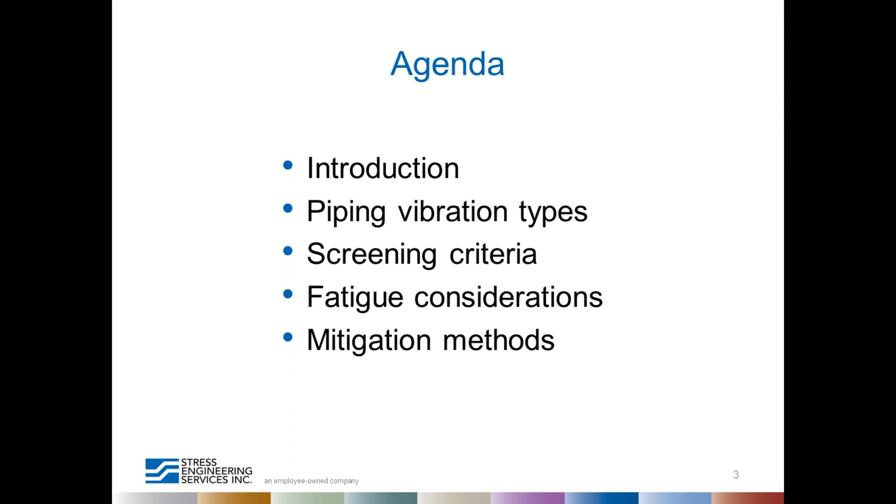Our agenda will be as follows. We will begin with an introduction, then we will talk about the various types of piping vibrations that can occur. Then we'll talk about overall vibration screening criteria that you can use to determine if certain piping vibration problems could be excessive. Next, we'll take a look at material fatigue, since piping usually fails due to high cycle fatigue if it vibrates excessively. Finally, we'll visit some common mitigation approaches.

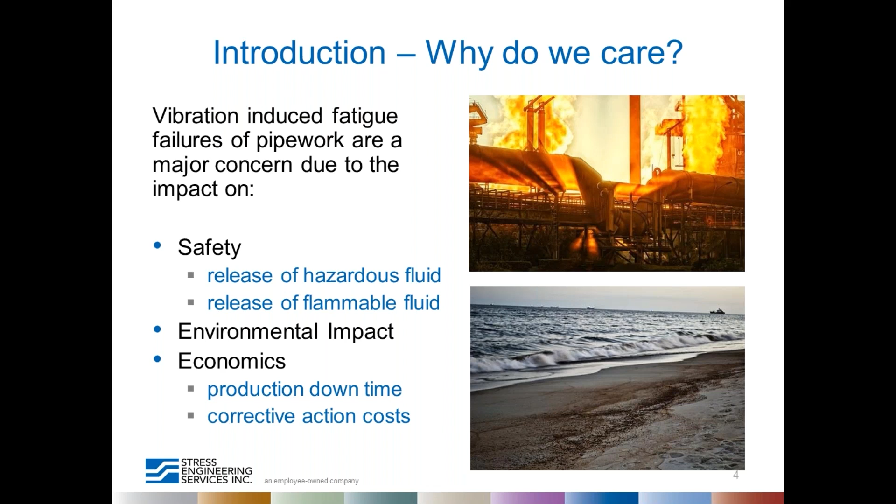Sometimes the question is asked, why we even care about piping vibration? Well, some studies estimate that 10 to 15% of piping failures in onshore facilities and 20% in offshore facilities are caused by vibration-induced fatigue. The failures themselves then present significant risk in terms of personnel safety due to the potential release of hazardous and flammable process fluids. There's also an environmental impact and economic impact due to the potential production downtime as well as corrective action costs.

The main reason for piping vibrations becoming an issue is that fixed equipment vibration problems are usually dealt with reactively. There are only a few situations where piping vibration issues are dealt with in the design phase. These include heat exchanger tubes, reciprocating machines, and thermowells.

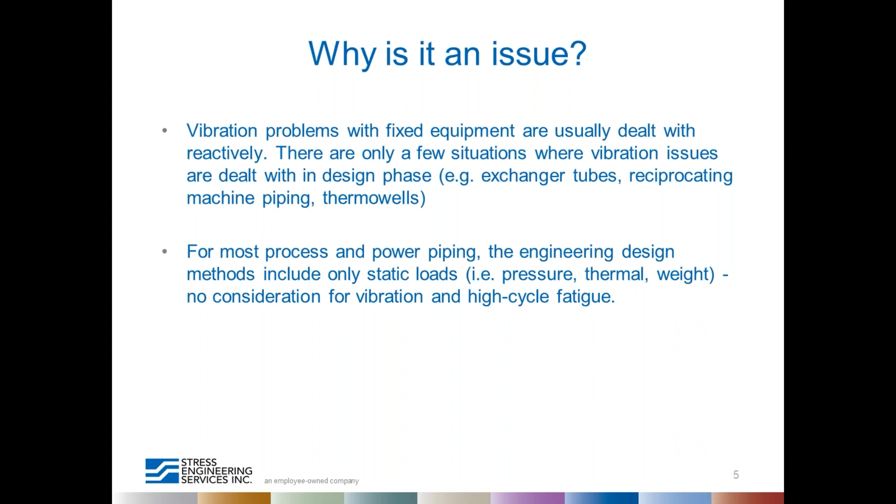For most process and power piping, the standard engineering design methods include only static loads. In other words, internal pressure, thermal expansion, dead weight, occasional loads, etc. There's no consideration for vibration and high cycle fatigue. Having said that, the Energy Institute does have some guidelines for minimizing the likelihood of piping vibration-related failures for new plant designs.

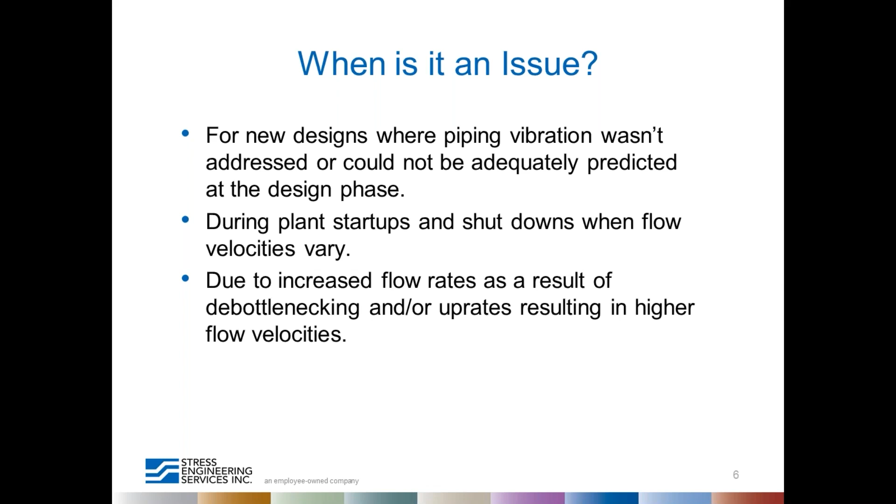Piping vibration problems can surface at any time, but there are situations when they become more likely to appear. These situations include the following: new designs where piping vibration wasn't addressed or could not be adequately predicted at the design phase, plant startups and shutdowns when flow velocities tend to vary, and after a debottlenecking or uprate effort that resulted in increased flow velocities.

Even in the situations listed on the previous slide, excessive piping vibration typically occurs due to resonance. Resonance happens when an excitation frequency coincides with the pipework natural frequency, often resulting in substantial levels of vibration, especially if the system damping is low.

approaches 1.0 and the damping ratio approaches 0, the response approaches infinity. In real-world systems, the damping ratio is never 0, so the response amplitude always remains finite. However, it can still get very, very large. Small bore piping connections can be particularly vulnerable to this effect.

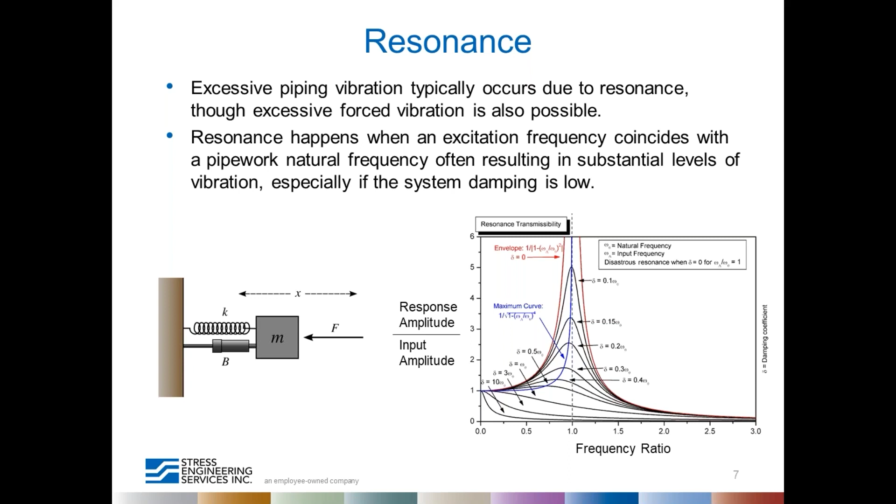Piping vibration, unlike rotating machinery, is typically not monitored routinely using instrumentation in operating plants. Therefore, piping vibration problems are often identified initially by visual observation. The vibration is either visible itself, or it may have caused a failure that led to a visible condition, such as a leak. Sometimes piping vibration is discovered by the effect that it has on the equipment that is attached to, such as rotating machinery, which is routinely monitored for vibration.

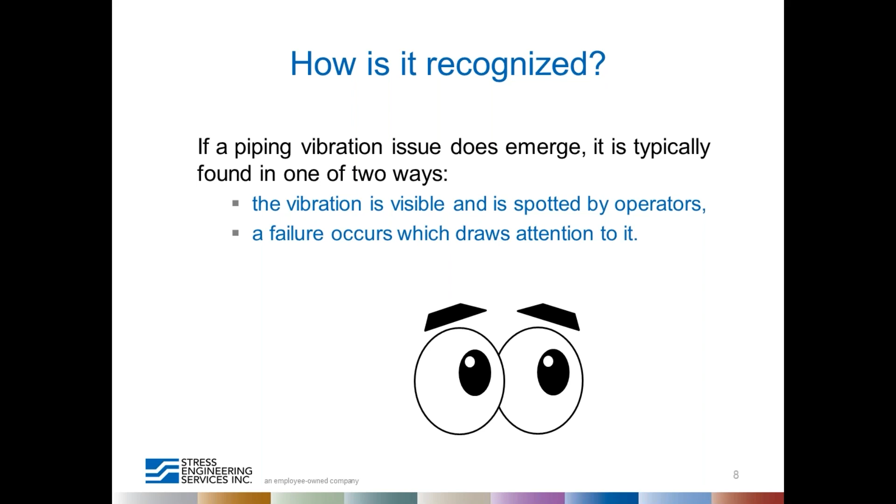Next, we'll take a look at the various types of piping vibration. Piping vibrations can be categorized in many ways. One way to categorize them is by frequency.

At the very low end of the frequency range, we have the vibration of long spans of unsupported lines, which generally take place in the 1 to 10 Hz range. Large bore piping with shorter unsupported spans and small bore branches will generally vibrate in the 10 to 300 Hz range, which is still referred to as low frequency in documents like the Energy Institute guidelines.

High frequency vibrations, 300 Hz or greater, can occur on any piping geometry in the presence of a high frequency excitation source, such as a pressure drop device.

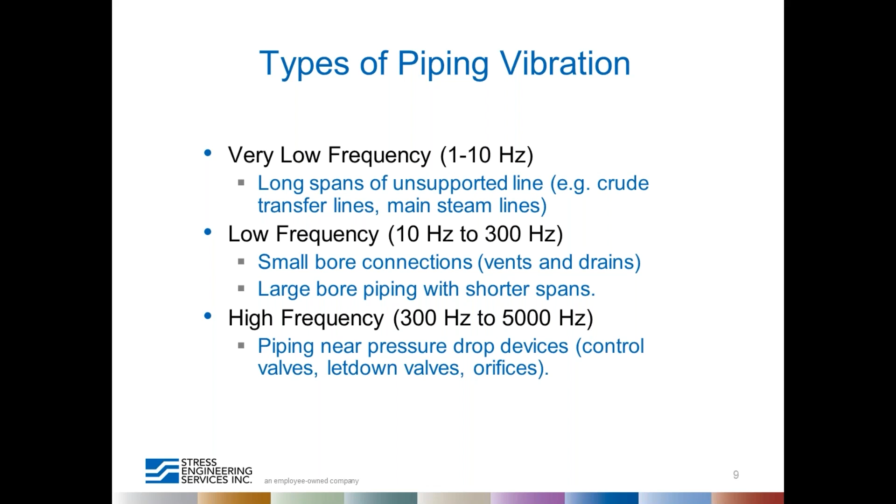Piping vibrations can also be categorized based on their vibratory mode shapes, which are related to vibration frequency. At the lower frequencies, the piping responds in a bending mode, where the center line of the piping is displaced. At higher frequencies, shell mode responses become more likely, where the piping center line stays in place and the pipe wall is deflected in waves around the circumference. What is considered high or low frequency depends on the geometry of the piping. So ultimately, what modes get excited depends on the piping geometry and the nature of the excitation.

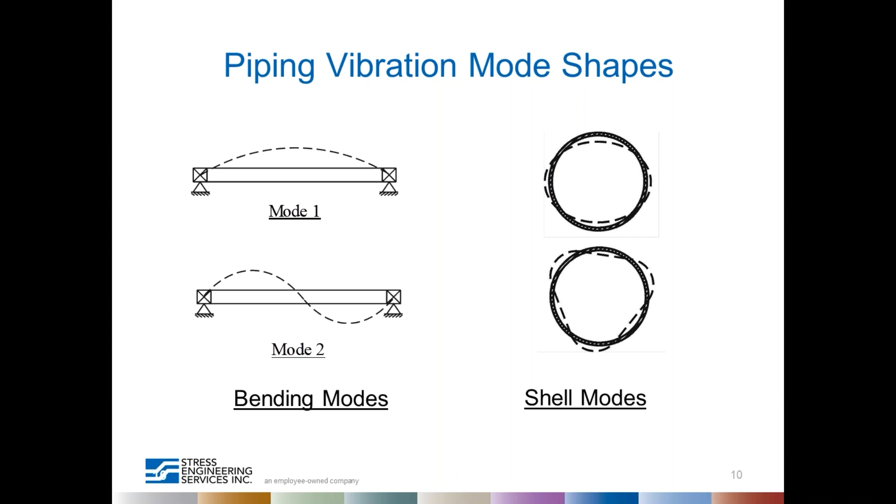Excitations themselves fall into three types. Tonal, where all the excitation energy is at one discrete frequency. Multi-frequency, where the excitation energy exists at multiple discrete frequencies that often come in at integer multiples. And finally, broadband, where the excitation energy covers a continuous range of frequencies. All three types may be present in a system for a given problem simultaneously. However, one type will tend to dominate for severe cases.

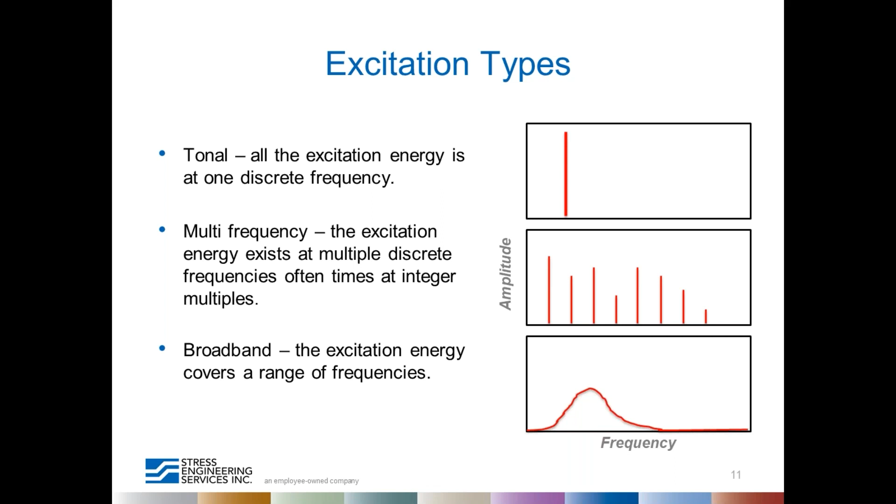The excitation can come from a variety of sources. The source could be, for example, mechanical forcing due to imbalance on a pump or reciprocating compressor cylinder vibration. In these cases, the machine acts as a shaker that's attached to the piping.

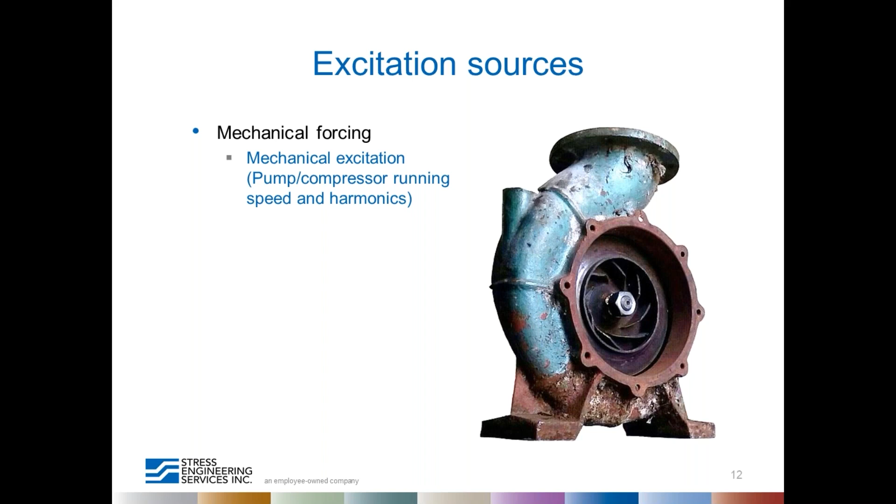Piping vibration can also be driven by machinery-generated pulsations. These pulses travel up and down the piping and exert forces internally on the elbows and tees. Positive displacement devices such as reciprocating pumps and compressors inherently generate significant pulses in the working fluid, which usually need to be controlled via pulsation dampeners at the inlets and outlets of the machine. Centrifugal pumps and compressors generate pulses at what are called vane pass frequencies, but these pulses tend to be less intense than those from positive displacement machines. Properly attenuated pulsations from positive displacement devices and vane pass frequency pulsations usually won't become an issue unless there's acoustic resonance in the piping to amplify them.

Acoustic resonance is a phenomenon where pressure waves are amplified via the formation of standing waves in an acoustic cavity, such as a piping circuit or vessel.

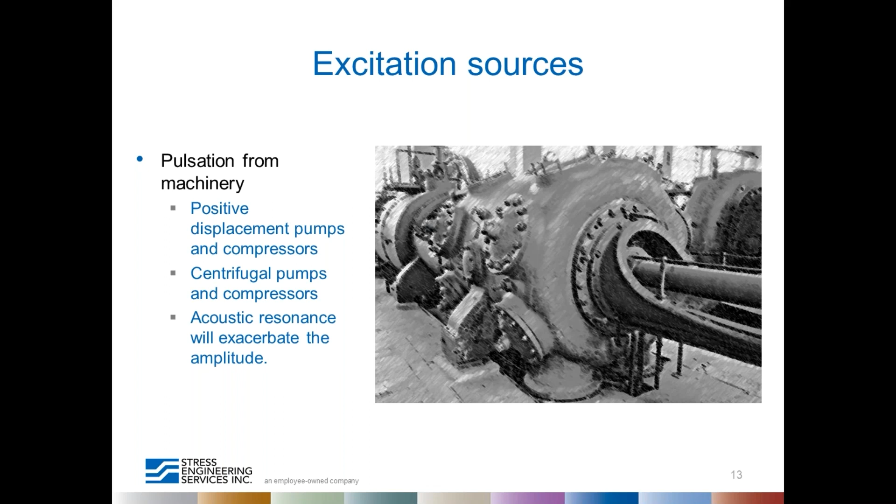The excitation can also be related to disturbances in the flow. Flow-induced turbulence will generate broadband excitation, typically up to around 100 Hz. Flow can also induce pulsations similar to those generated by machines if a disturbance in the flow sheds vortices at regular intervals. This can occur in any frequency range depending on the piping geometry and flow characteristics. Once again, the amplitude of the resulting vibrations typically won't become a concern unless the pulses get amplified by acoustic resonance.

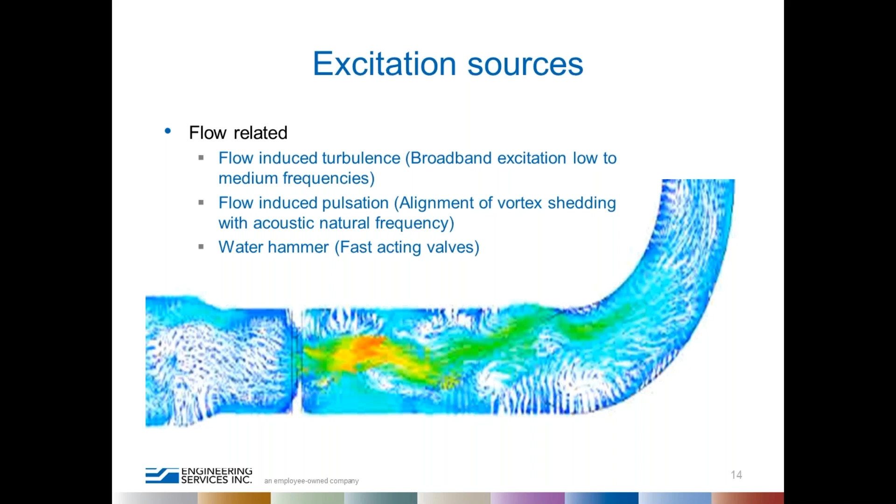The last item in the list on this slide is not a source of sustained vibrations. Water hammer is a phenomenon that can be generated by sudden changes in flow velocity, for instance, by fast-acting valves in a piping system. It generates an intense transient response and can excite all the piping natural frequencies in a certain range. SES has a separate webinar dedicated to dealing with water hammers from a fluid dynamics perspective.

The last excitation source I'm going to mention is that from pressure drop devices such as orifice plates, control valves, and pressure relief valves. In gas systems, these devices can generate high-frequency acoustic excitation. This type of excitation can be quantified and evaluated based on the sound power level generated by the device. In liquid systems, the pressure drop can result in cavitation or flashing, which also generate high-frequency broadband excitation.

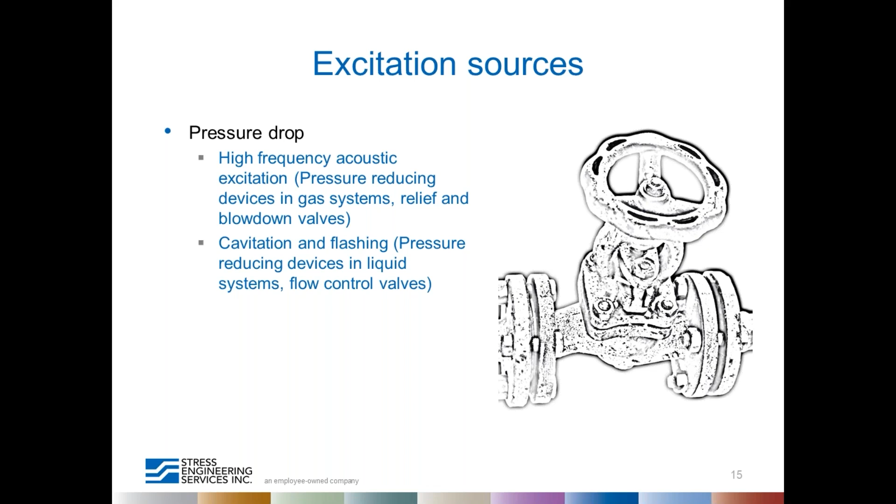Once a potential piping vibration problem has been identified, it is necessary to take vibration measurements to quantify it. The process of collecting this data can superficially appear to be similar to taking data on rotating machinery, but there are a number of important factors to consider in order to ensure the collection of valid and useful data.

For example, piping vibration can reach double-digit levels, greater than 10 inches per second, so it is important to make sure that sensors have adequate measurement range. It is also important to make sure sensor mounting methods yield adequate frequency response. Magnet-mounted sensors will usually work, but if the piping is hot or made of stainless steel, special brackets may be needed, which will often reduce the usable frequency range.

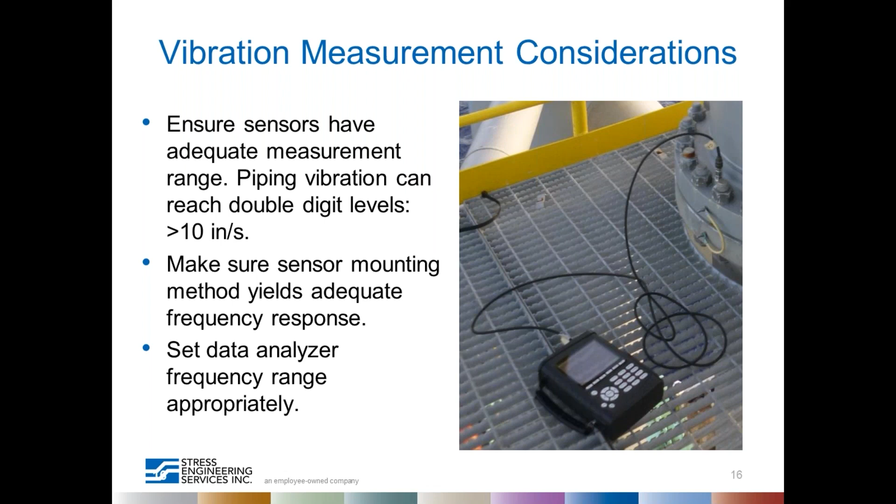When dealing with piping vibration problems, it may be necessary to collect a large amount of data, so it is a good idea to set data analyzer frequency spans appropriately. The analyzer frequency span will dictate the necessary data sample rate, which is typically 2.56 times the frequency span. There is no need to take thousands of samples per second for a low-frequency turbulence-induced vibration problem, for example. But a low-frequency span setting might miss the high-frequency content associated with the cavitation issue.

Shell mode vibration problems can present additional data collection challenges. It may not be possible to get good readings using magnet-mounted accelerometers. For excessive levels of shell mode vibration, these sensor mounts will tend to walk around on the pipe surface, so stud and adhesive mounted sensors may be required, which can be difficult to attach during operation.

In these instances, a laser vibrometer can be very useful for collecting the data, since it is not limited by the vibration frequency or amplitude, or the target piping material or temperature. Of course, laser vibrometers have their own limitations. They require a certain amount of physical space near the equipment and a line of sight that is ideally perpendicular to the target surface.

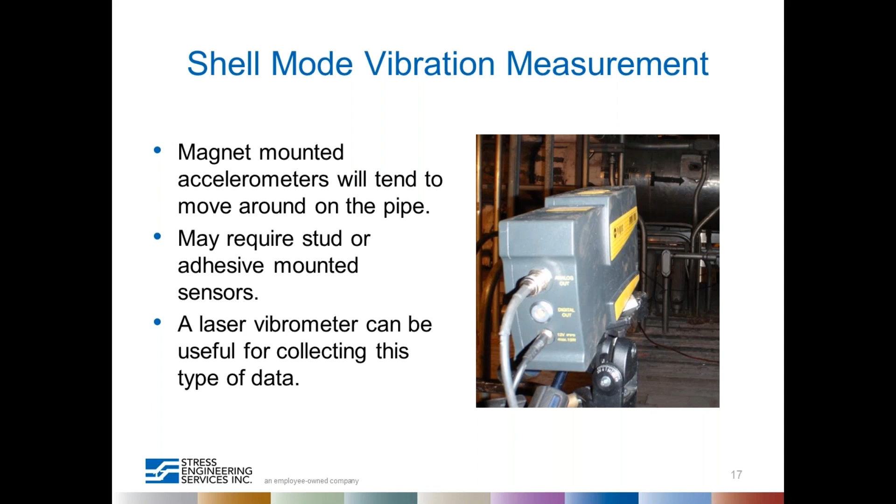Once vibration data has been collected, the question immediately becomes: is the data acceptable? The easiest way to make that determination is to compare the data to a screening criteria. There are virtually an infinite variety of piping configurations out there, and as we have seen earlier, there are many different types of piping vibration problems, so it may seem impossible to come up with generic screening criteria. Still, generic screening criteria do exist, and they come in two flavors: single value or screening curve.

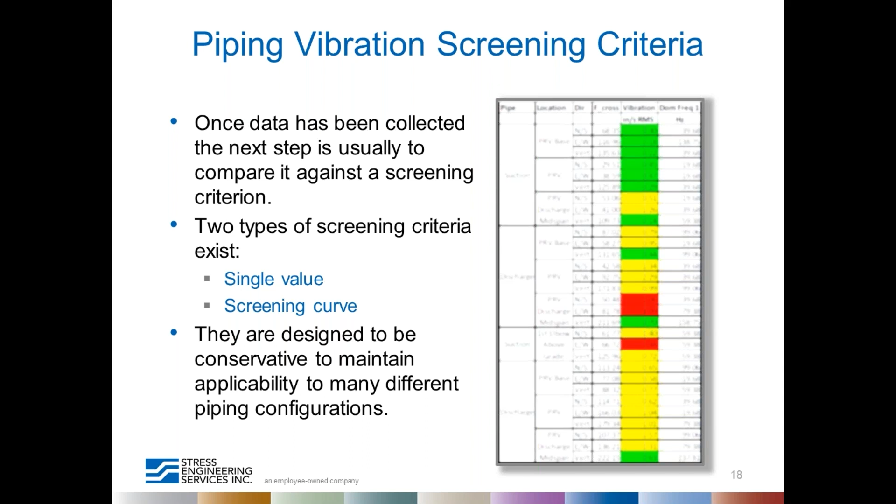Single value screening criteria are the easiest to use, but can be overly conservative. One of the well-known single value screening criteria comes from the ASME standard for the operation and maintenance of nuclear power plants. The ASME OM3 guidelines include a number of factors for taking into account different piping configurations. When all those factors are set to their most conservative values, the acceptance threshold becomes a half inch per second peak. The Russian boiler standard provides a similarly low value. Those values are in fact so low that a large percentage of piping in process plants would likely fail screening under this criterion, even if they have been operating trouble-free for decades.

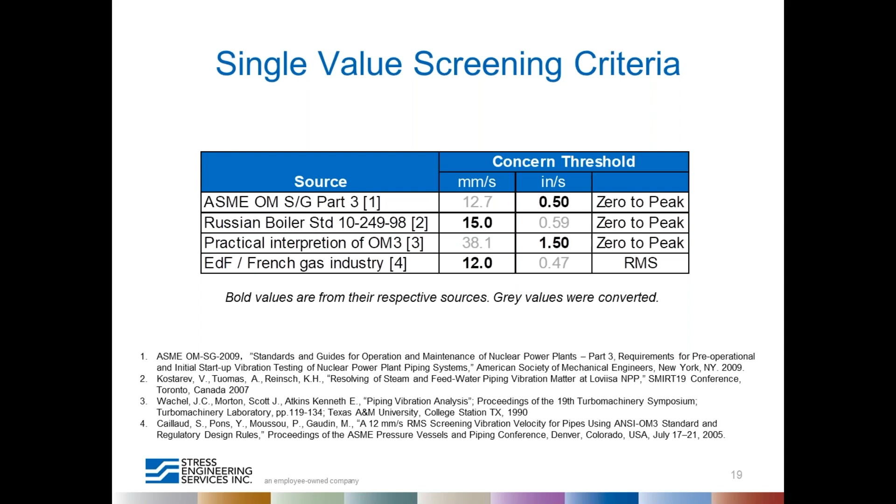More reasonable single-value screening criteria are offered through a practical interpretation of the OM3 guidelines by EDI, which yielded a limit of 1.5 inches per second peak, as well as the French power and gas industries, which use 12 millimeters per second RMS, which equates to about 0.47 inches per second RMS, where RMS stands for root mean square.

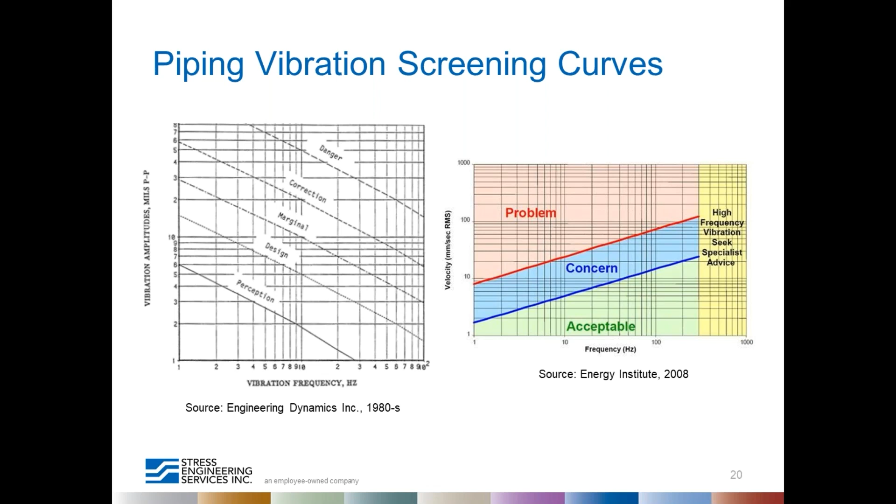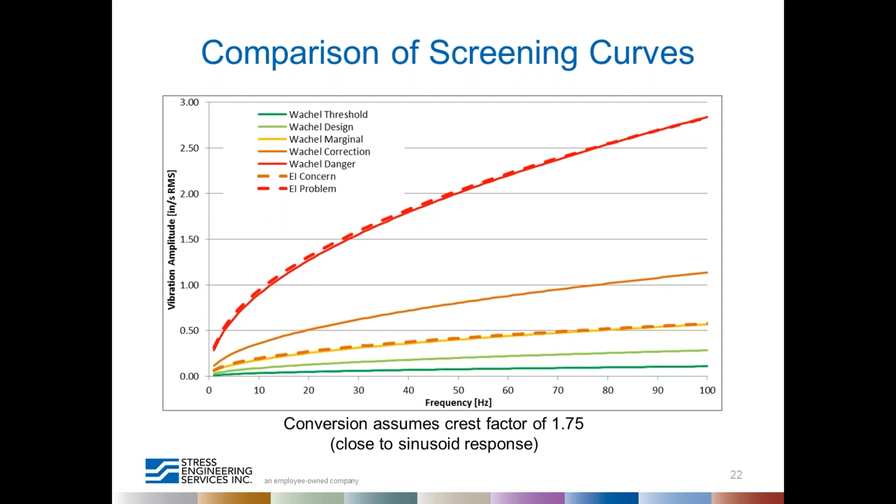Speaking of sine waves and crest factors, it is important to note that these curves were originally designed to be applicable to piping vibration where the response is in fact at a single frequency, for example when the piping is in full-blown resonance. While that sometimes is indeed the case, there are many other cases where the response is more complex. In those cases, SES recommends assigning the overall RMS level of the signal to a single effective frequency derived from the spectrum and comparing those values to the screening curves.

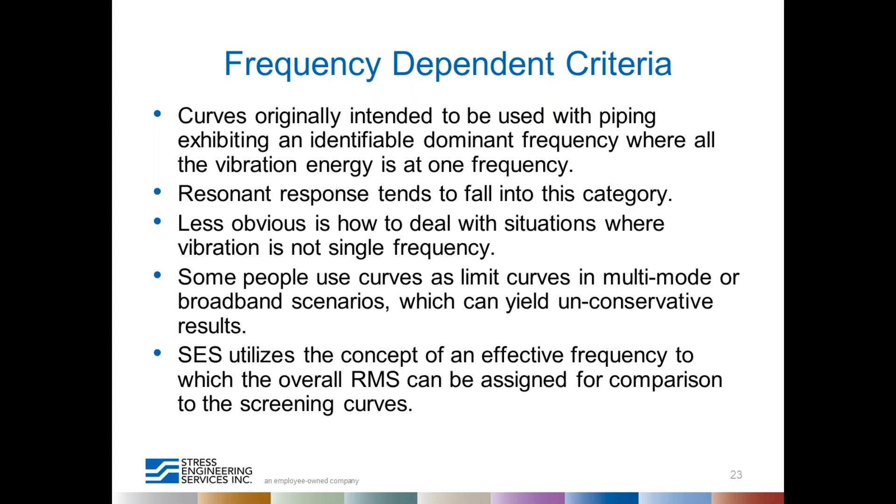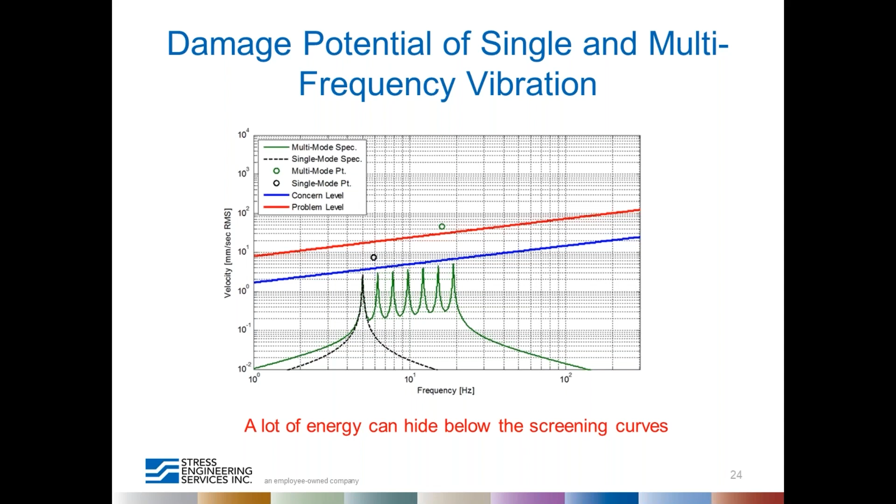Once a screening criterion has been exceeded, the next step is to get an idea of the dynamic stresses in the piping. This is because the vast majority of piping vibration-related failures are due to material fatigue, and fatigue is a function of alternating stresses. Note that fatigue can take place well below the yield strength of the material, in the linear portion of the stress strain curve, so the alternating stresses do not have to be exorbitantly high for this to happen.

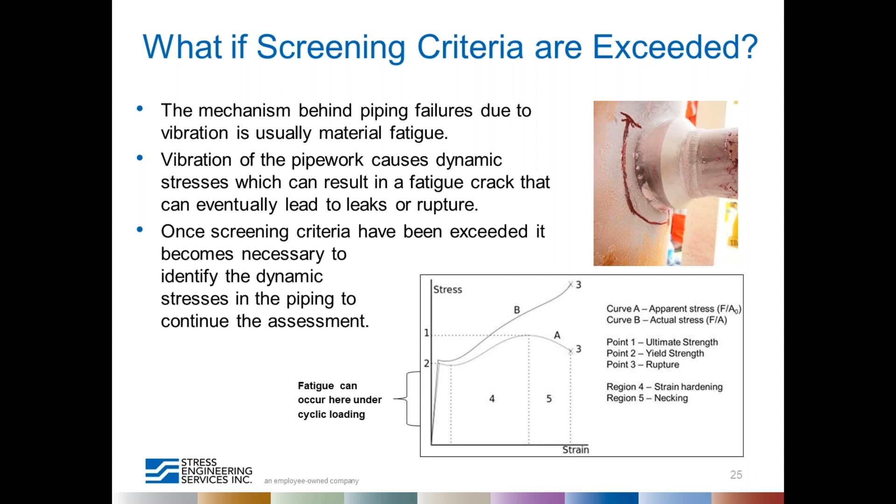One way to get an idea of the stresses is to build a computer model of the piping. Since it is extremely difficult to analytically predict piping vibration response due to the various excitation sources, the model generally needs to be calibrated using vibration data measured in the field.

For best results, use multi-channel data acquisition to help calculate the operating deflection shape of the piping, in addition to determining the frequency and amplitude of the vibration. If the stresses are found to be excessive, the computer model can also be used to test mitigation strategies for reducing the stresses.

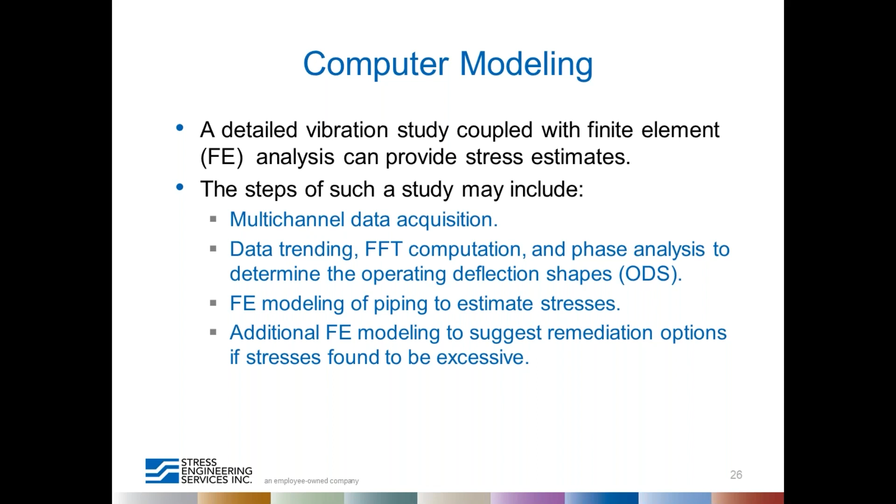As we saw a couple of slides ago, fatigue takes place in the linear part of the stress versus strain curve. Therefore, another possible option to obtain stresses is to measure the dynamic strain directly on the piping and relate it to stress using the Young's modulus and Poisson ratio of the material.

This measurement is typically performed using strain gauges. The downside of this method is that strain gauges are not nearly as straightforward to use as accelerometers, and one has to have a pretty good idea of the location of the maximum stress for this approach to work.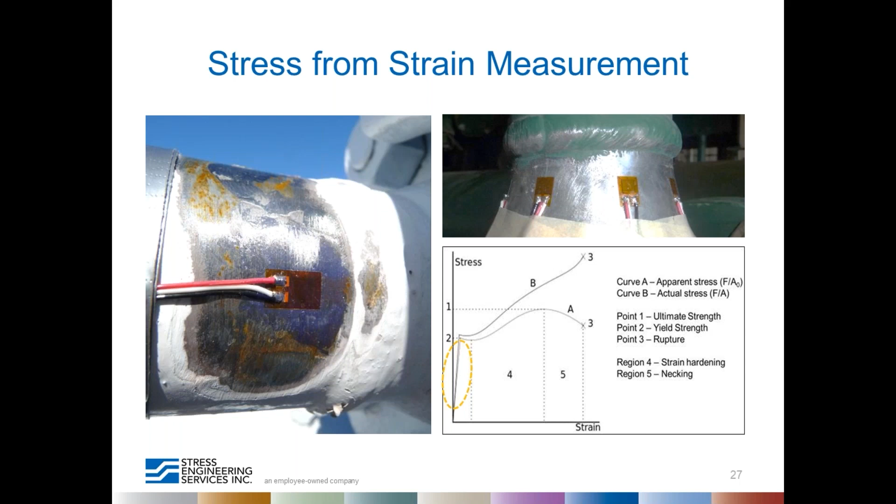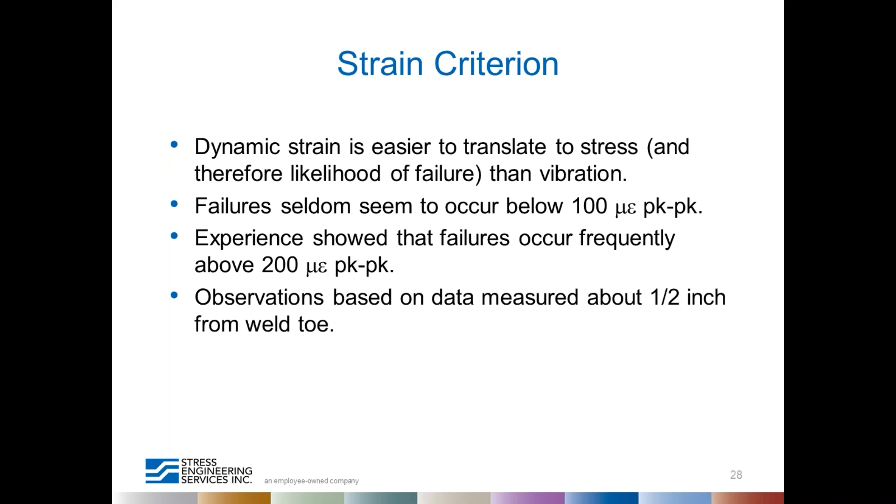If strain measurements are feasible, they provide a possible shortcut to doing a full-blown fatigue assessment. It has been observed that failures seldom seem to occur below 100 microstrain peak to peak, while they tend to occur frequently above 200 microstrain peak to peak. These measurements were taken about a half-inch from the weld toes, therefore they do not include the full stress concentration effect of the welds.

Introducing a strain acceptance criterion brings up the question of whether it would conflict with the previously mentioned single value vibration screening criteria. Based on one data set collected in the field, keeping the vibration below 12 millimeters per second RMS, which equates to 0.47 inches per second RMS, appeared to keep the dynamic strain below 100 microstrain peak to peak, so no contradiction was found.

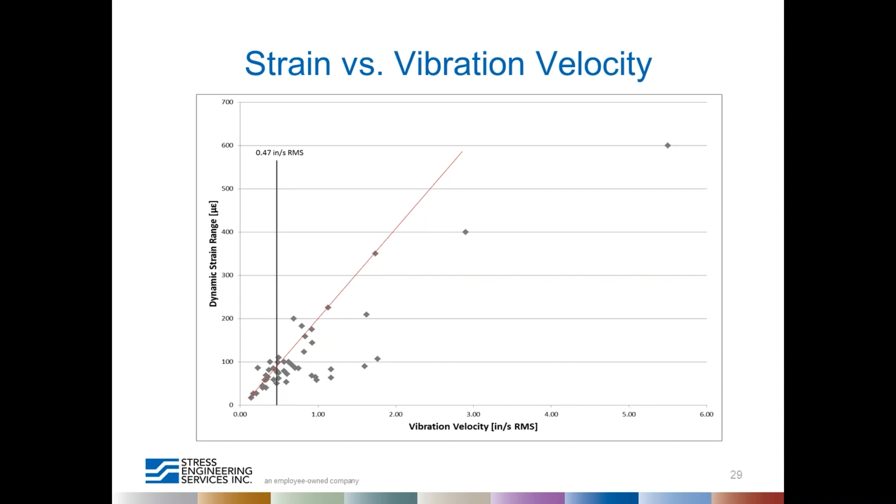Once the dynamic stresses have been estimated, the corresponding fatigue life estimate can be obtained from fatigue curves, sometimes referred to as SN curves. The fatigue life of the component is given by the value on the horizontal axis at which a horizontal line drawn on the SN curve at the estimated stress range intersects the relevant fatigue curve.

The fatigue life of a component under high frequency vibration can be relatively short, in some cases as short as hours or days. If the vibration is low frequency or intermittent, the fatigue life of the component can be much longer.

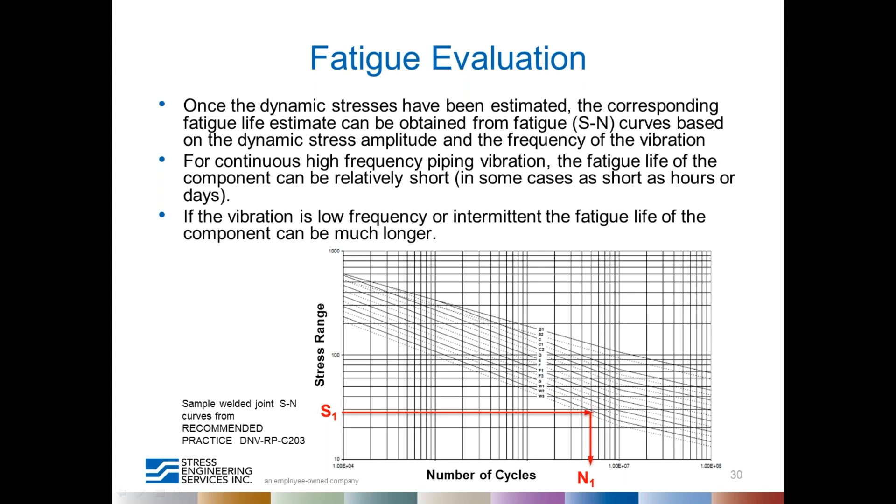Once it has been established that the vibration is excessive, the attention typically turns to mitigation. There are three fundamental approaches to minimize the risk of piping vibration-related fatigue failures: reducing the excitation, reducing the response, and making the piping more fatigue resistant. The first one is usually the best approach, but it is not always feasible.

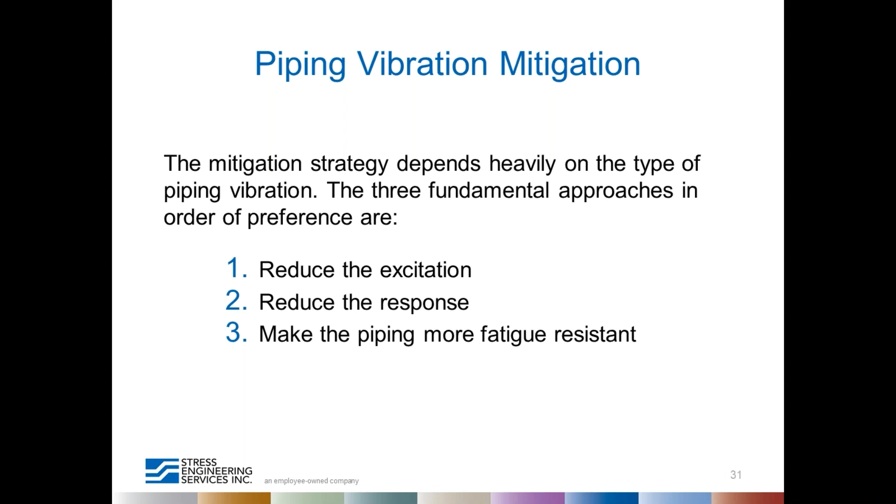On the next set of slides, we will take a look at some of the solutions available for common examples of piping vibration problems. The first example will involve the very low frequency vibrations of long, unsupported piping spans. Next, we will visit some examples of low frequency vibrations, including the vibration of small bore branches, large bore lines driven by mechanical excitation, and large bore lines driven by pressure pulsations. Finally, we will look at some high frequency vibration examples, such as shell mode vibration at the compressor lobe or vane passing frequency, and broadband vibration due to control valve cavitation and acoustic excitation.

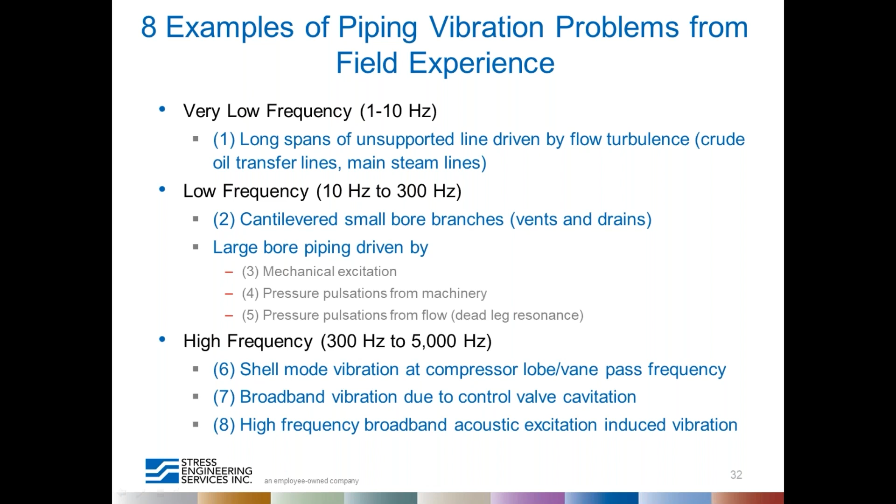Mitigating the very low frequency vibrations of long unsupported piping spans can be achieved by reducing the excitation, reducing the response, or both. The excitation can be reduced by decreasing the flow velocity or decreasing flow turbulence by applying flow smoothing. Flow velocity can be reduced by increasing the pipe size or running an additional line in parallel. Flow smoothing can, for example, be accomplished by using large radius elbows instead of mitered elbows, and using swept tees instead of regular tees.

The response of the piping can typically be reduced by reducing unsupported span lengths and supporting concentrated masses, which effectively increases the stiffness of the piping. Be aware that on piping that operates hot, thermal expansion related stresses will likely increase due to the addition of additional supports. If those stresses look like they will become intolerable and supports are definitely needed, you may need to use viscous dampers instead of rigid struts.

Of course, the question could be asked, why not use viscous dampers in all cases and not have to worry about thermal stresses? Well, it's because they're not maintenance-free items, so you could be trading one set of problems for another.

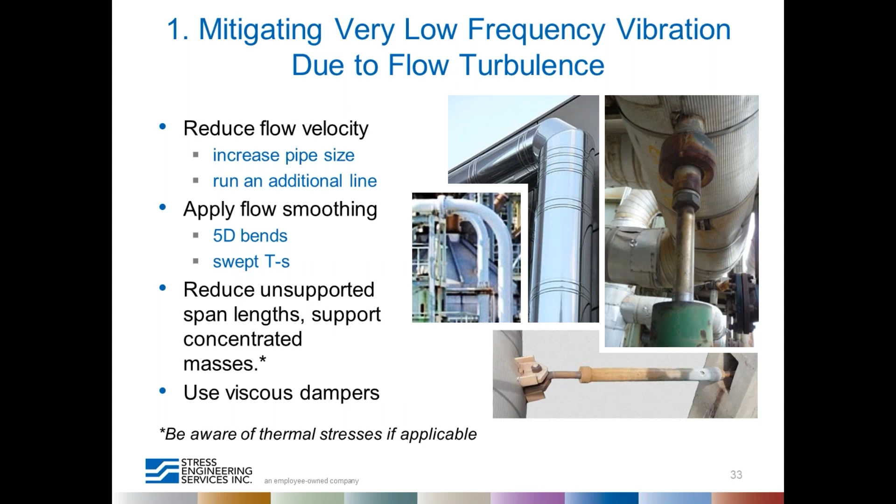The most common approaches to reducing the vibration of small bore connections on large bore piping involve reducing any cantilevered masses and bracing the small bore connections in all the directions that the branch can vibrate. Since the goal is to reduce the relative motion between the branch pipe and the main pipe, bracing should always be accomplished using a tieback support to the parent pipe. Never brace small bore connections to the ground or other structures.

Note that they may need to be rerouted, or the configuration may need to be changed in order to facilitate effective tieback bracing. A relatively invasive but usually effective third option is to simply increase the diameter of the branch connection.

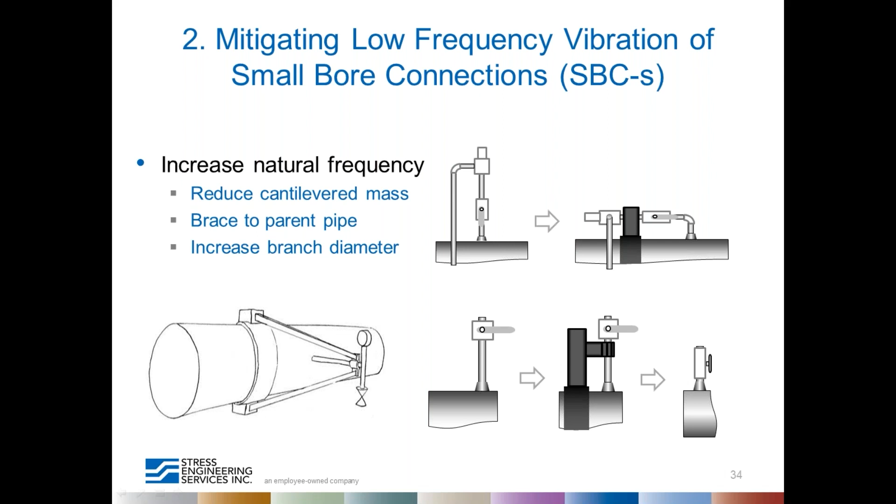Low frequency piping vibration due to mechanical excitation is typically not a problem unless the piping is in resonance. If the piping is in resonance, the best course of action is usually to stiffen the piping and thereby increase piping natural frequencies above the forcing frequency. If that is not feasible, one can try adding mass to the piping to lower the natural frequency, but never try increasing the stiffness and adding significant amount of mass at the same time, because their effects will cancel out.

If the mechanical excitation is due to a machinery fault, such as imbalance or misalignment, the fault condition needs to be mitigated as well.

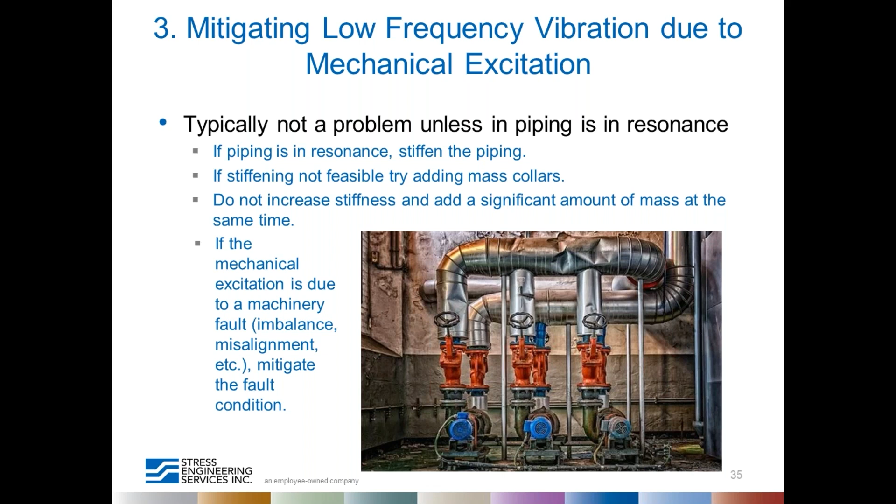Low frequency piping vibration due to reciprocating machine pressure pulsation is typically not an issue unless there is insufficient pulsation control at the inlet and outlet of the cylinders, or there is acoustic resonance in the attached piping, or there is mechanical resonance in the attached piping. Sometimes a triple alignment occurs between pulsation frequency, acoustic natural frequency, and structural natural frequency of the piping, which constitutes the worst case scenario, often resulting in failures.

Consequently, and depending on the situation, the mitigation options are to perform an acoustic study and/or brace the piping. An acoustic study can help design better pulsation control and identify ways to prevent acoustic resonance in the pipework. The goal of bracing the piping is to tune the piping natural frequencies away from pulsation frequencies. This is sometimes easier said than done.

Note that reciprocating machines generate pulsations with a lot of running speed harmonics, and the piping also has many natural frequencies. Therefore, it can be quite tricky to try to ensure that there is no alignment between any of them. And if you have a variable speed drive attached to your compressor, things get even more interesting.

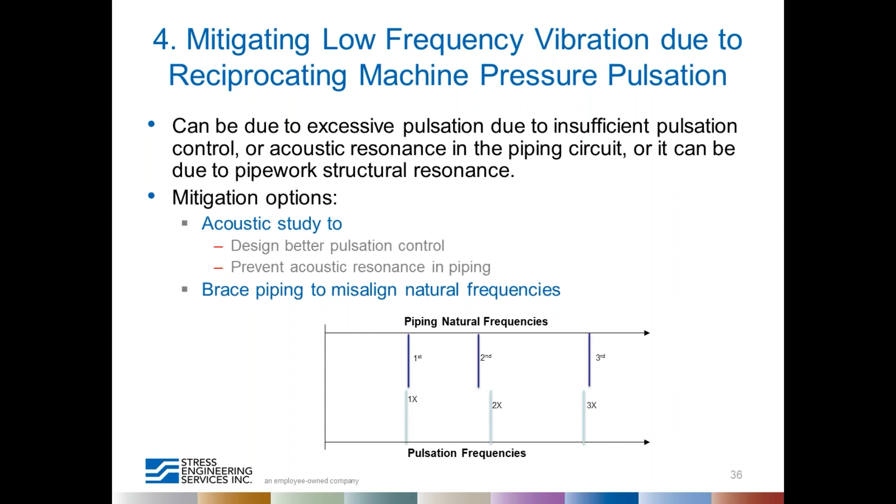A common cause of piping vibration due to flow-induced pulsation is dead leg resonance. Dead leg resonance occurs when the flow past a closed side branch opening sheds vortices at the same frequency as the acoustic natural frequency of the dead leg volume.

Theory suggests that a significant change in the length of the dead leg should be sufficient to prevent resonance. However, in practice, this phenomenon can be quite stubborn and persist unless the dead leg length is reduced to an absolute minimum.

Minimizing the dead leg length is typically achieved by installing a valve near the branch connection itself. If the dead leg cannot be adequately shortened, an alternative solution is the installation of a barred tee at the branch connection if the process allows it. A well-designed barred tee can inhibit the formation of vortices at the shear layer between the stagnant fluid in the dead leg and the flow in the main line.

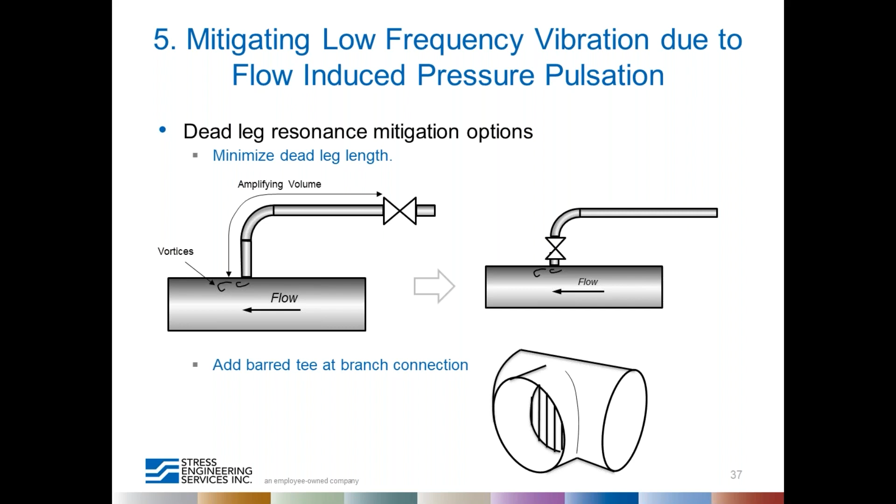High frequency pulsation from centrifugal and screw compressors can excite the shell mode vibration of the attached piping and vessels. This phenomenon has been observed anywhere between 300 and 2000 Hz, therefore it is in the high frequency range.

It is typically accompanied by high noise levels in the area. The resulting shell mode vibration can reach well over 10 inches per second, and any small bore connection in the vicinity may not survive. It may be possible to reduce the excitation intensity by making small adjustments to the rotor design, though this is unlikely to make the problem go away entirely.

The most common approach is to use a thicker pipe wall to prevent the shell mode resonance. To apply mitigation while the system is still in service, external stiffeners can be clamped on to achieve a similar effect. If there is an acoustic resonance component to the problem, inserts can help break up any standing waves that form in the piping cross-section.

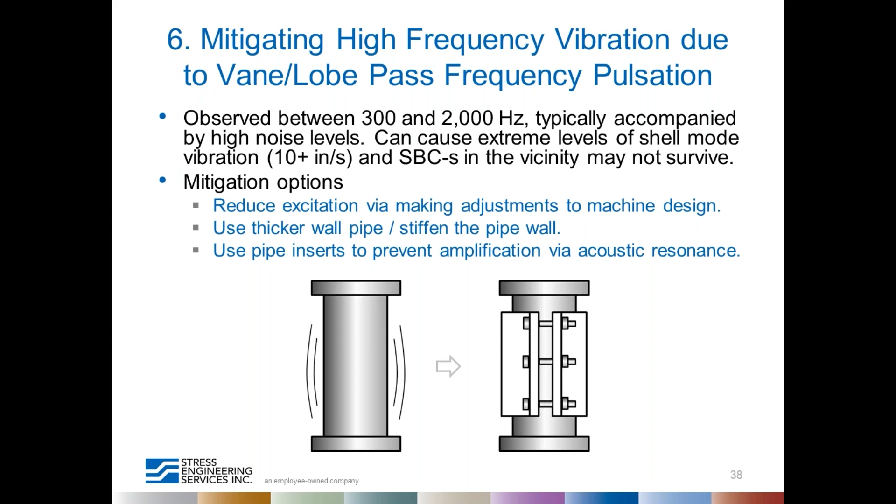Cavitation at a pressure drop device occurs due to the fluid pressure dropping below vapor pressure at what's called the vena contracta, where the flow velocity is at a maximum slightly behind the pressure drop device.

These can be eliminated by installing a second valve in line with the original valve. Each valve can then be set to a larger opening to reduce the pressure drop per device while still achieving the total pressure drop required by operations. The same effect may be possible to accomplish using a multi-stage valve, which effectively integrates the function of multiple valves in a single device.

Since any small bore connections near the cavitating valve are usually at the greatest risk of failure, bracing them in conjunction with a full encirclement repad or moving them away from the valve may buy you some time, especially if solving the cavitation issue is going to take an extended effort.

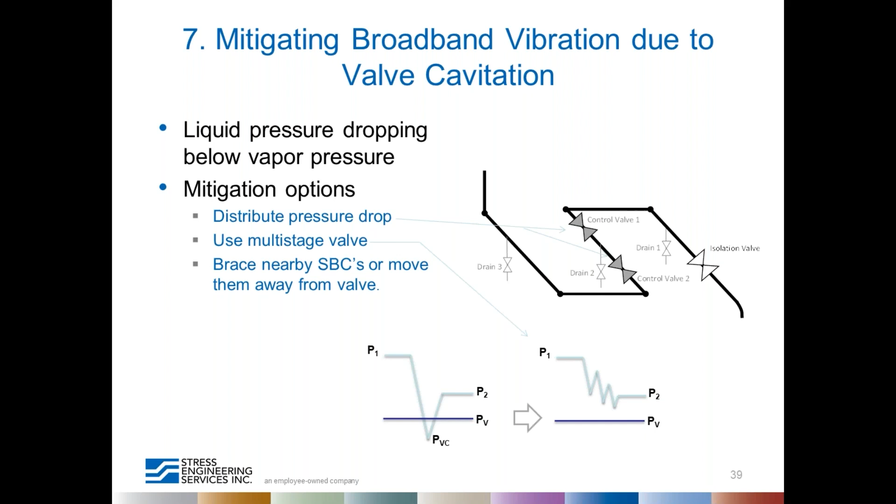High frequency acoustic vibration generated by pressure drop devices can be reduced by distributing the pressure drop using less restrictive devices in a tandem arrangement. In the case of control valves, it may be possible to fit the valve with a low noise trim.

Reducing the flow rate by introducing a parallel line is also an option, since the energy dissipated by the pressure drop device is a function of both the pressure drop and the flow rate.

Similarly to the case of cavitation, any small bore connections near the flow restriction are usually at the greatest risk of failure. Therefore, the same options to brace the small bore connections in conjunction with a full encirclement repad and/or relocating them away from the flow restriction apply in this case as well. I will mention that it is quite challenging to find stiff enough bracing that will work in the presence of high frequency excitation.

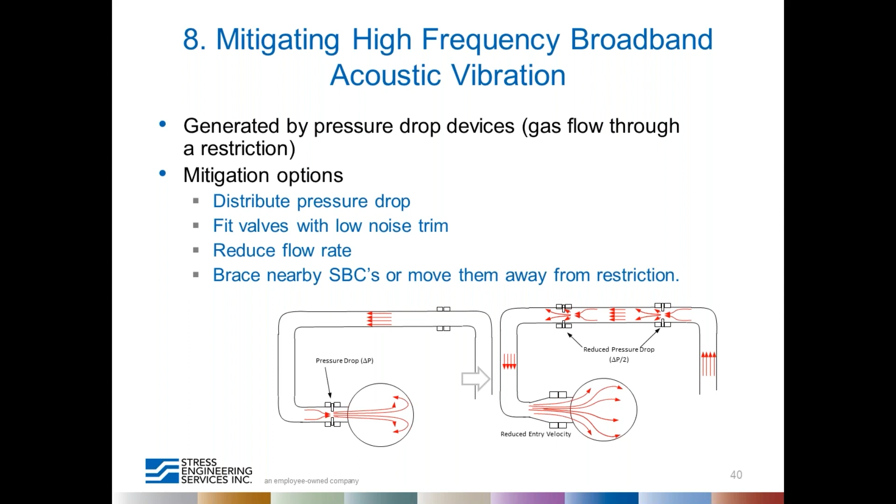If the source of the vibration cannot be eliminated, perhaps because it is an inherent part of the process, and the response cannot be adequately reduced, the only option left may be to make the piping more fatigue resistant by reducing the dynamic stresses in the piping. In simple terms, we'll just have to make sure that the pipework can withstand the vibration.

Typically, stresses in the piping circuit will be at a maximum at a location of stress concentration due to geometry. These stress risers can be eliminated by using components such as welding tees and contoured inserts instead of weldolets, which have sharp edges. You can also grind weld gaps and toes smooth to eliminate stress risers, and so on.

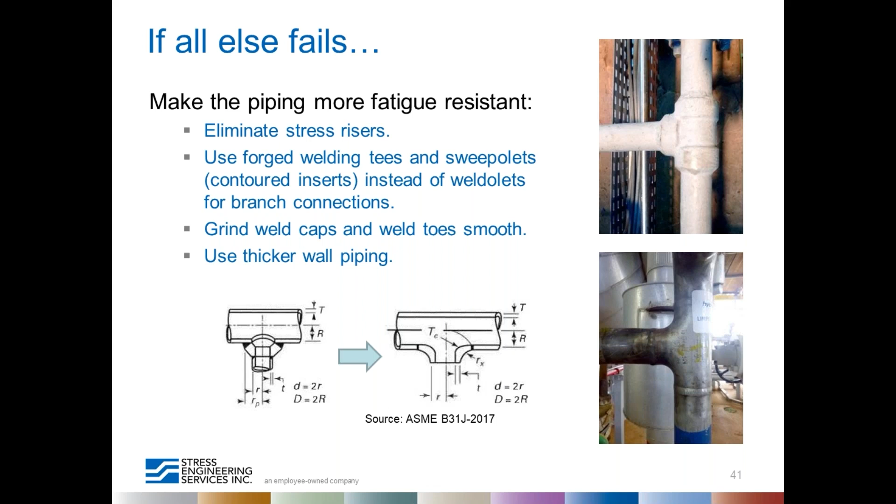Switching to a thicker wall piping also tends to reduce stresses, although it's not always possible. Unless it is cost prohibitive, it is advisable to redesign the piping to be more fatigue resistant whenever possible, even if the vibrations can be reduced, just for extra peace of mind.

This concludes our presentation.